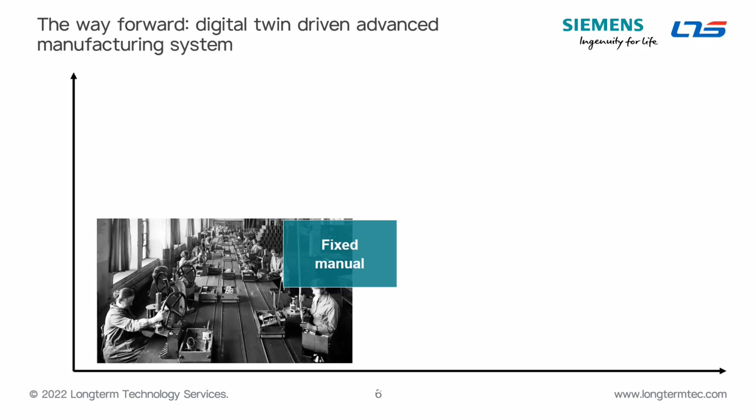Let's go to the next slide here. If you look at the different types of manufacturing processes, on the bottom left here, this is a fixed manual type of mass production. It can do mass production, but it's difficult and expensive to scale it up. On the top left is flexible manual mass production. It utilizes some automation to assist the manual operation, and it's more flexible, but it's also difficult and expensive to make changes to that.

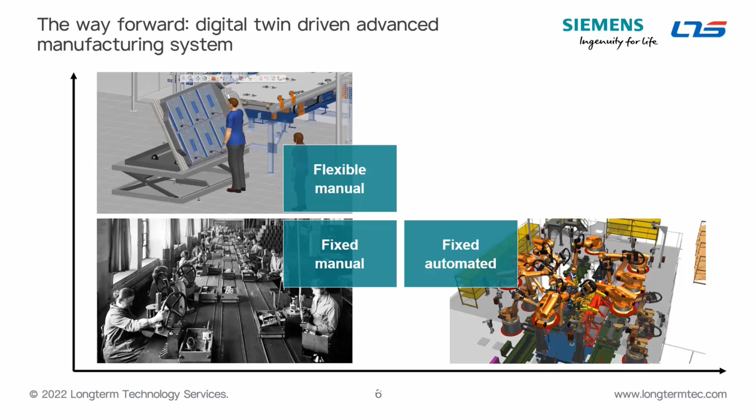On the bottom right is fixed automation systems, very prevalent today for mass production. It does the job, but it's also difficult and expensive to produce multiple products on the same line. So where things are moving is to this flexible, autonomous type of manufacturing. This is mass production that's flexible, but it's easier to accommodate changing product mixes. And that's the good news. The bad news is it requires more upfront engineering and planning. And this is where the digital twin of production systems is useful to speed up the design process and prove out the process before we actually implement it.

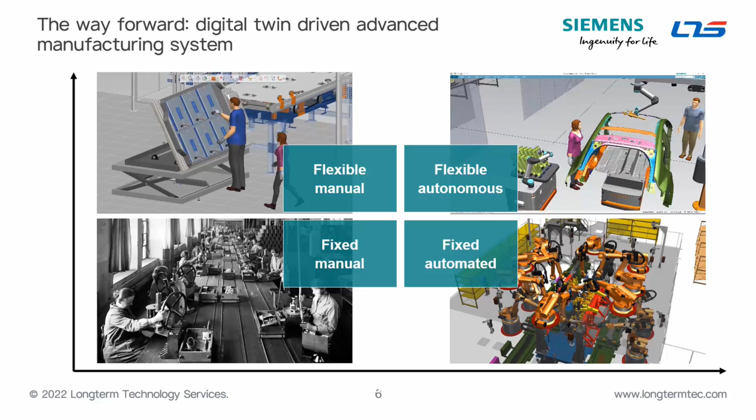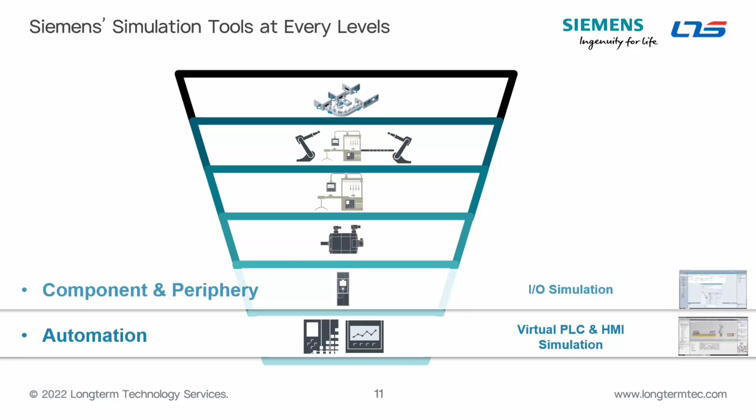Let's look at the next slide here. It talks about virtual commissioning and manufacturing simulation occurring at different levels. When we talk about simulation, we can work at different levels in the process. So in this slide, the very bottom level, the one that says automation, this is simulation of hardware devices like the PLC and the HMI. And I suspect that some of you on the line here today may be familiar with Siemens solutions like TIA Portal and PLCSIM Advanced, which fall into that category.

So Siemens offers simulation solutions at each one of these levels that we're showing here. But the one that we'll be addressing today is the second one from the top. It's called Robotic Station and Line. This is a simulation of the automation systems. And we'll be discussing virtual commissioning in the context of that level there.

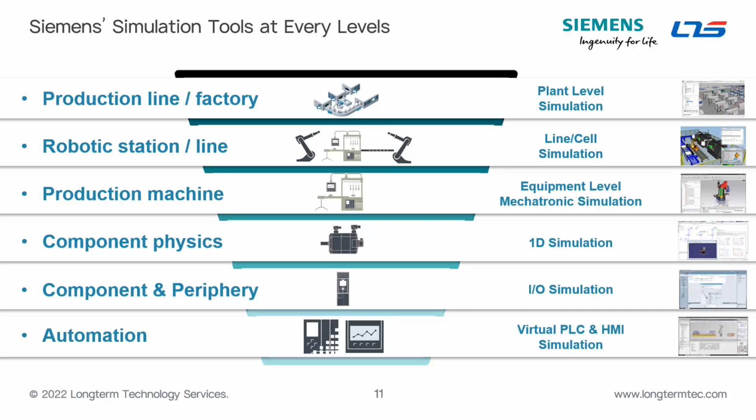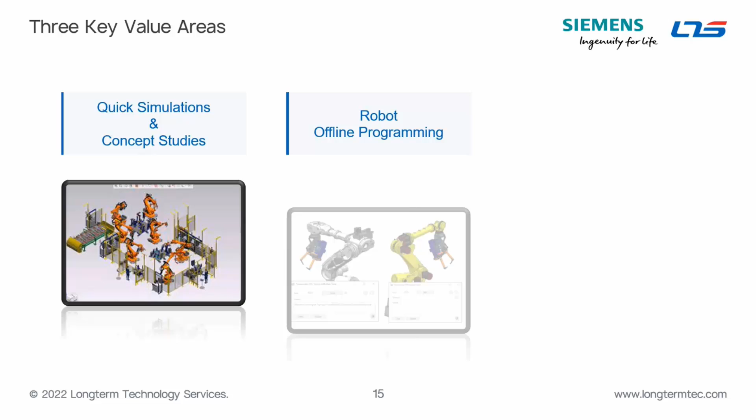So three key value areas, especially in the SMB space, for Process Simulate are quick simulations and concept studies. This is referring to what you're looking at early in the sales cycle. So your cycle time studies, quick simulations.

We've seen a lot of companies, especially SMBs, compete with much, much larger automation providers by creating these simulations up front and really giving the customers the confidence that they're already pretty far down the road in terms of the design of the process and the system. And we see this really helping companies win contracts in those early sales stages.

From there, you get into your robot offline programming. Process Simulate is a platform where you can do robot OLP programming the same way that you would do with your vendor softwares, like RobotStudio, KUKA.Sim Pro, all of those softwares. You can do it for up to the 15 most common robot brands within Process Simulate, so one platform for doing all of that.

And in so doing, you are prepping your simulation for virtual commissioning, so when you're driving that system using your real PLC or HMI.

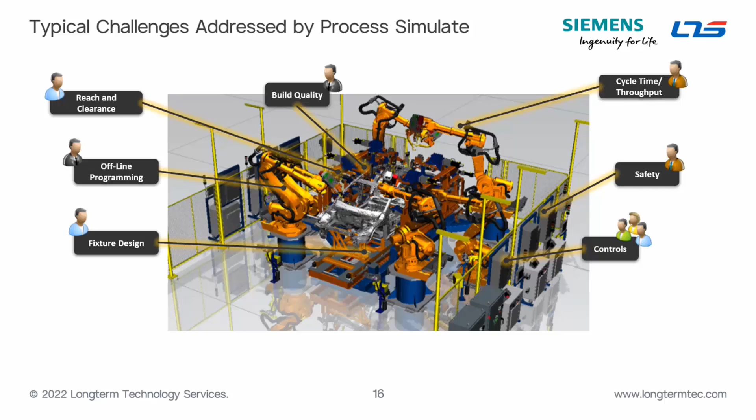Typical challenges that people are addressing with Process Simulate are things like your fixture designs, your robot offline programming, you're validating your reach clearance with it, overall build quality, you're generating cycle times using the software's engine and algorithms. You're validating your safety, your controls through virtual commissioning, overall system layout, and any requirements that you have to meet, whether that be facility requirements or, as we're increasingly seeing, requirements from your customer.

As Brian mentioned earlier, we're really starting to see a lot of these documents now coming out of the OEMs, and the OEMs are saying, for this project, you must use Process Simulate. There's even been situations where the people we were talking to thought that Process Simulate was actually referring to the phase of the project rather than calling out a very specific solution that they had to use. And in those cases, we have to point out, no, it's not just a project phase. Process Simulate refers to the tool itself.

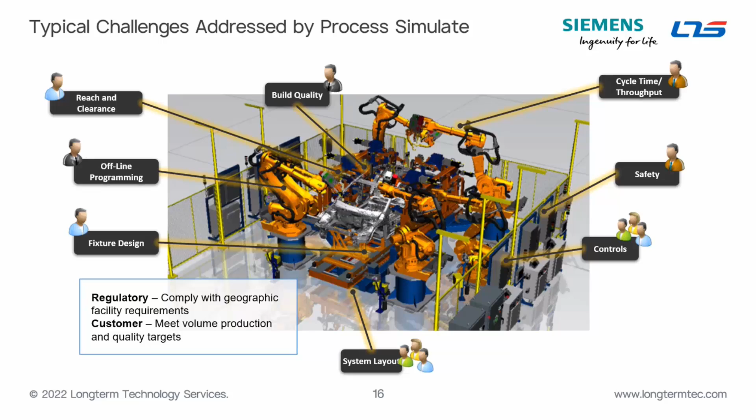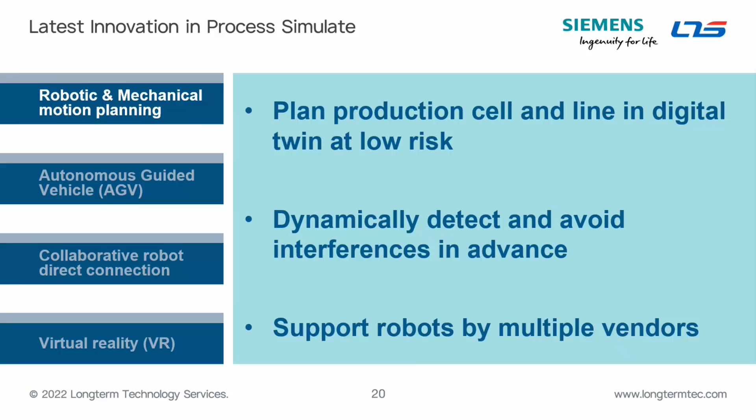And with that, what you're doing is your process definition, your robotic programming, your automation controls, and your virtual commissioning. Now, some of this on the robot programming side, I'm going to move through pretty quickly because the topic today is virtual commissioning. This is just more foundational for prepping a simulation for virtual commissioning. So here you're going to plan your production cell and your line in your digital twin at low risk, as Brian has mentioned, and you're going to detect and avoid interferences in advance.

So what you're seeing on the screen here right now is an example of somebody performing their robot offline programming using Process Simulate. So here you have a KUKA robot with an end-of-arm tool that is doing a pick-and-place operation onto a conveyor with battery packs. And what this is going to demonstrate is the person using this software to detect a collision and then fix that in the robot program.

So first, they're going to hit play and run this simulation. And we're going to see that when they do that, the end-of-arm tool is going to come down at a poor angle, and it's going to clip the edge of that battery, which you see highlighted here in red in the collision viewer, and down here in yellow it's highlighted on the 3D as well.

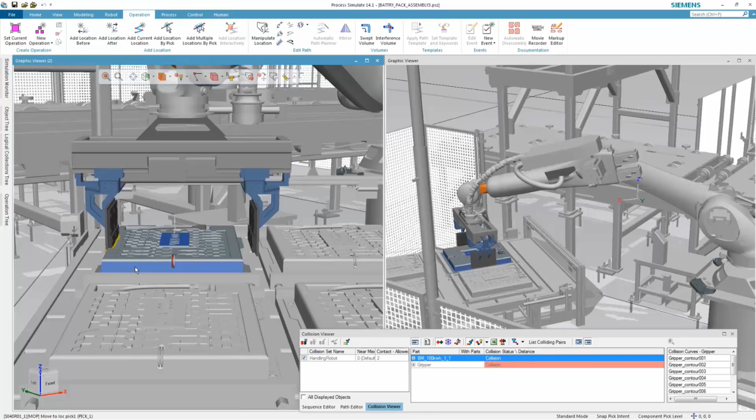Once the user realizes that this issue is happening, they're going to use the software to get a proper approach angle here and jog that robot up and down on the axis to make sure that the approach is correct. Once they have the approach that they want, they will restore the gripper action, the grip closed, now that they have got the path they want. From there, first they will validate that the path is correct. Now they're happy with that.

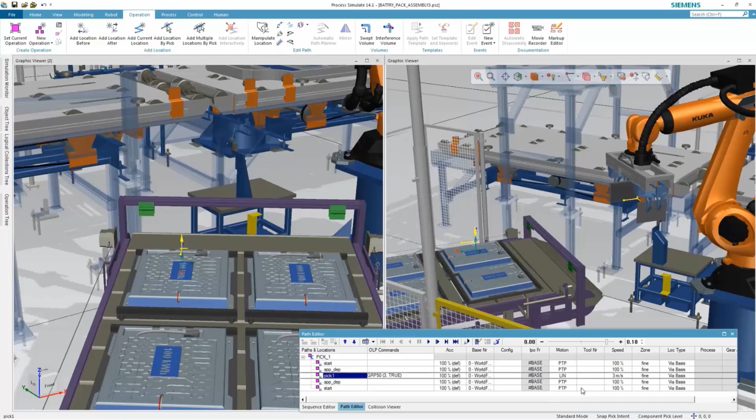Now that the path is correct, they want to finish off this action by setting the motion parameter, the OLP command, by putting in the grip action there, adding that, rerunning it, and now the program is running appropriately. It's a pretty simple example, but this is just to give you a sense of the UI of the software and how somebody is performing the robot offline programming within the software to generate that robot program that you will later virtually commission, and the fact that you can do this with any major brand of robot within Process Simulate, all on a single platform.

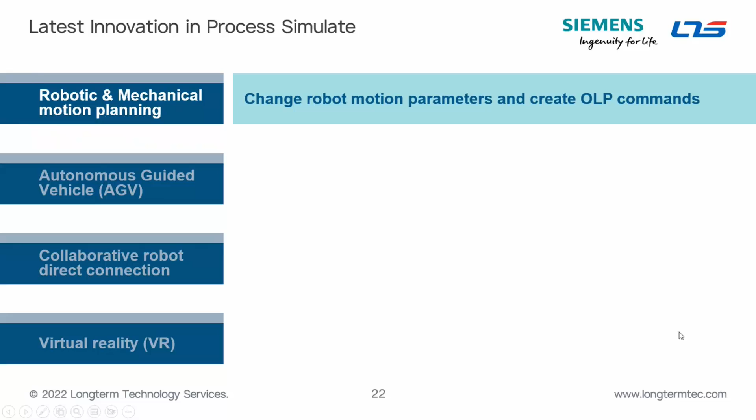So there we were looking at changing the robot motion parameters and creating your OLP commands. Another really cool thing with Process Simulate is when you're doing your design reviews and your remote collaboration, this is something you can do with your own team. This is a single button you hit within Process Simulate to bring you into this view.

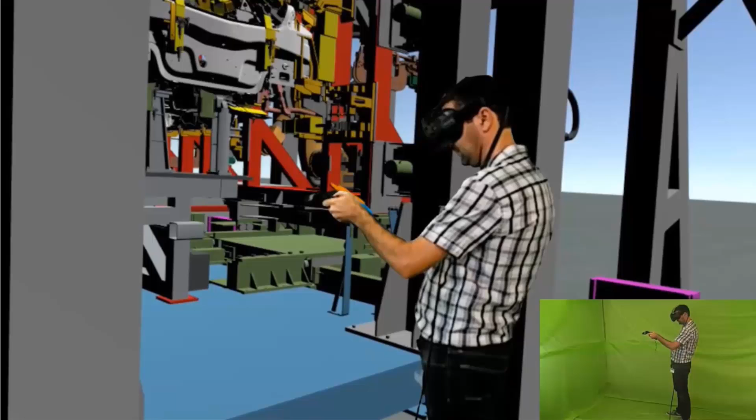You can do design reviews with your team, or you can do design reviews with your customer if they want to get a sense of the scale of the system and really make it tangible for them as they are waiting for it to arrive and be set up, especially if you're waiting for the physical hardware. This can just help create a lot of peace of mind and can help them ask questions about the system and how you're going about designing it. And that allows for greater collaboration and evaluation of that system.

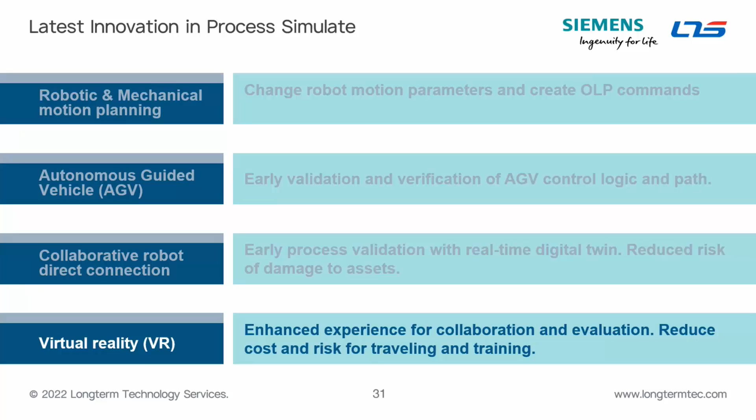Before I proceed, since I'm getting into virtual commissioning now, any questions so far about what you've seen?

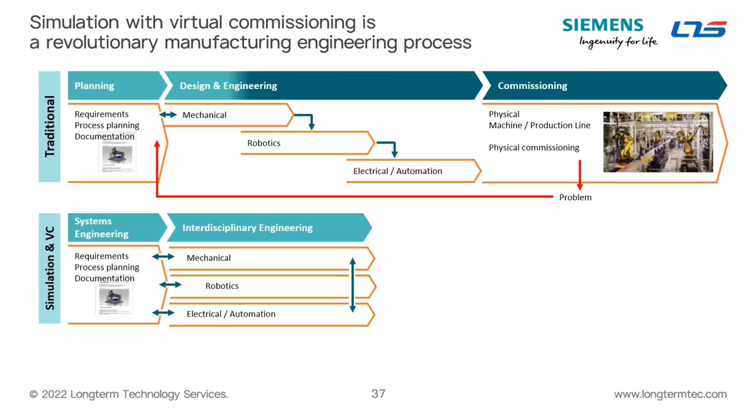What's happening with virtual commissioning is that you still have the same requirements, process planning, documentation, but once you get into the engineering phase, because the mechanical, the robotics, and the automation are all validated and tested within the exact same tool, the same virtual environment, that creates a lot more simultaneity in the work between those groups and a lot more collaboration, because people can basically dump their work into the Process Simulate software as soon as they really have anything, even a concept.

And then from there, you're moving into your commissioning stage. And now that physical commissioning time is significantly compressed because it should be extremely turnkey by the time you get through your virtual commissioning. It should be one and done. It's all working the way you expected because you have validated that against the digital twin in the virtual setting. If you do catch a problem, it's going to be caught in the virtual world. And that will save you a lot of time, including money and possibly reputational risks if those problems were caught at the stage of factory acceptance testing.

And the idea there is that a lot of time is saved, more financial return, and this is really being driven by the tier ones and the OEMs especially, right? Because they need predictability over the timeline, and with hardware wait times and this and that, they need it to work when they turn it on the factory floor, and they cannot have a team in there setting up and tinkering with a system for much longer than they anticipated, which is why they need the peace of mind that comes with virtual commissioning, which is why they are demanding it from their suppliers.

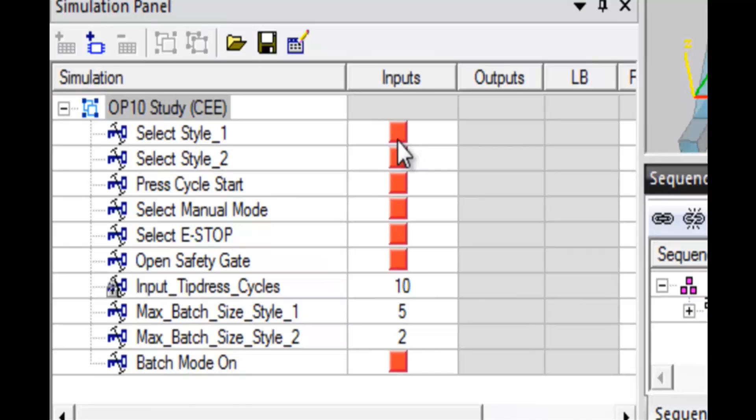Now, virtual commissioning solution overview. So the big thing to think about here is the fact that virtual commissioning is using your simulation that you have built in this program, but it is a signal-based simulation. So it is using your signals. And I'm going to give you an example of it here. In this case, you have two robots in addition to a pedestal, welding station, and a conveyor belt. So simple example, but just to illustrate the concept here.

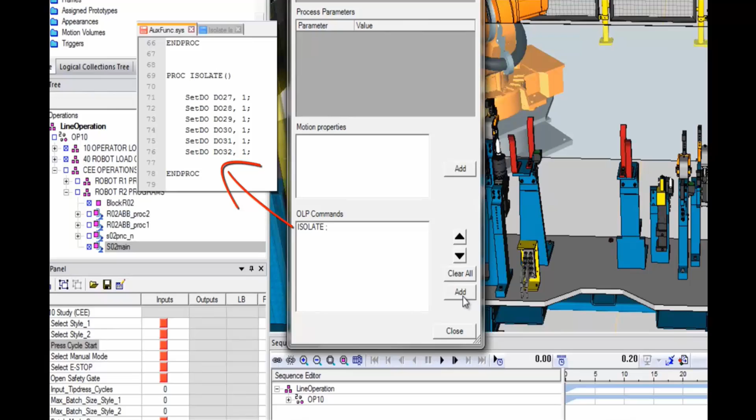First, this person, as you can see there, is manually triggering the inputs. The spot welding gun is coming in there on the part, but there is not a program yet for that second robot. So the user here wants to call a program that has already been created in the software for that second robot. So this gives you an idea of the UI that they are using to add that program. So they're adding in a new command.

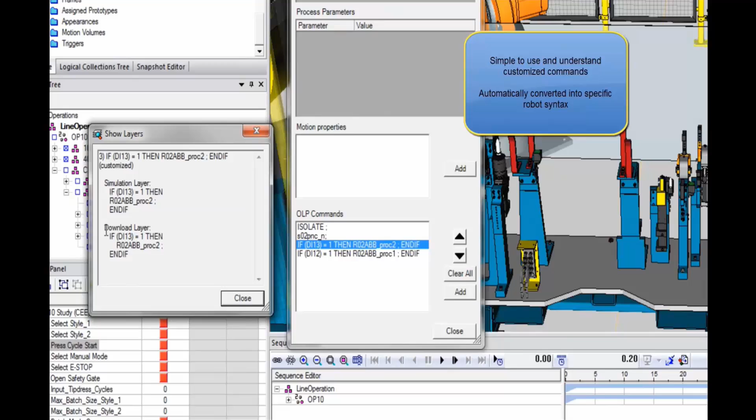They're going into the path to execute. Out of the paths that they have already programmed using the same software, they're calling that path. They're calling the style and the process signal and the path to call. They're adding that in. And you can customize all these commands. The other important thing is all of these commands are automatically converted into the syntax of whatever robot you were using. So these are good to go once you have generated these robot programs.

And finally here they are adding the home position. And from there, now they've added that second robot's program to be called, the signals. So in this case, they want to send the part to the pedestal welding station as well. So spot welder coming in there. Now the second robot has the program to be called, is bringing the part over to the pedestal welding and then onto the conveyor to be taken away.

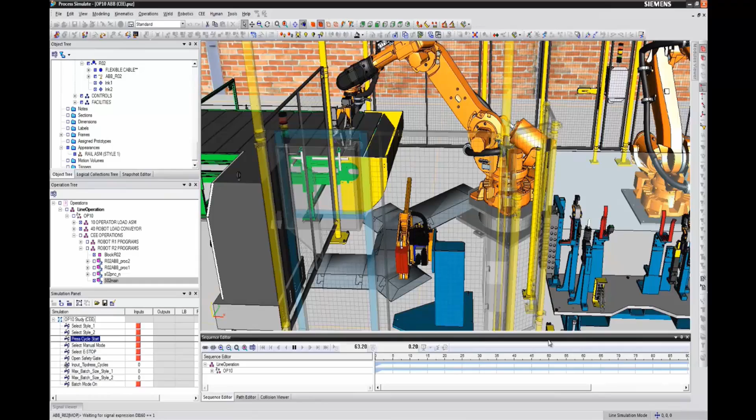So the next question I ask is, well, what if I want a variant? What if I want to skip the pedestal welding? Well, because of the way that they have inputted their paths to call, now they can very easily trigger the signals in order to skip that pedestal welding and bring that part directly to the conveyor.

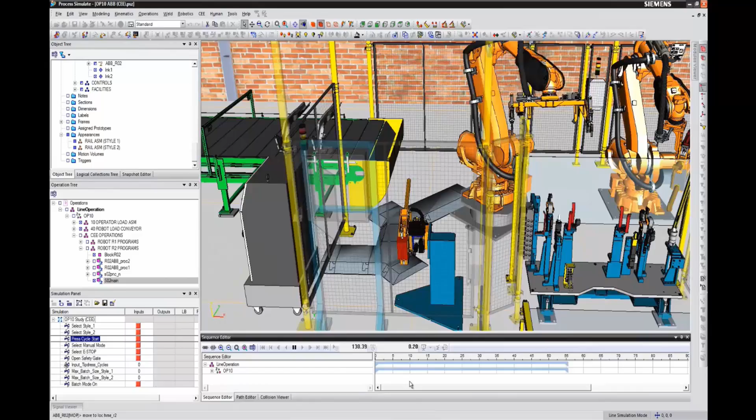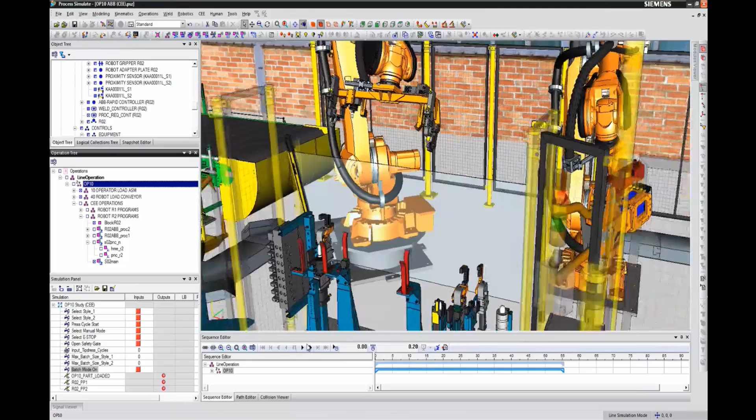For this third example, we want to see how they address a problem that is caught in the simulation. So if in real life, service personnel left the gripper closed, is there a way to handle that with your signals and to safeguard against that, is the question they're asking here. So they are playing this simulation. They're manually activating those inputs.

Spot welding comes in as always. The gripper comes in. That gripper is in the closed position, so it wasn't reset to the open state, and there's potential damage to that gripper, the robot, the fixture, all of it. This is not something you would want to catch on the real system. So this is a quick run through how the person is going to troubleshoot that. They want to reset the gripper to the open pose in the first location of the pounce operation to make sure that that is always the case.

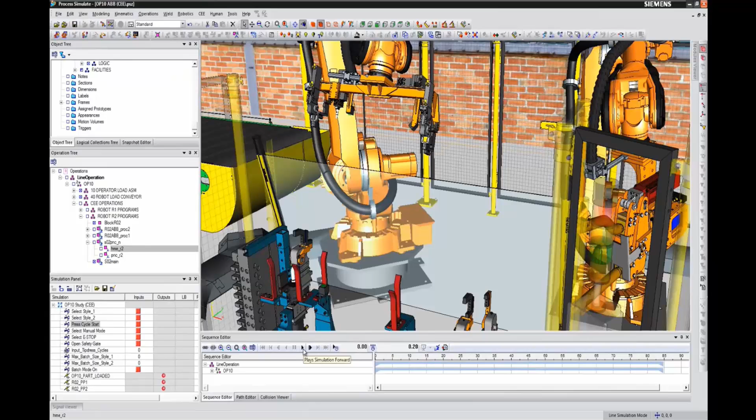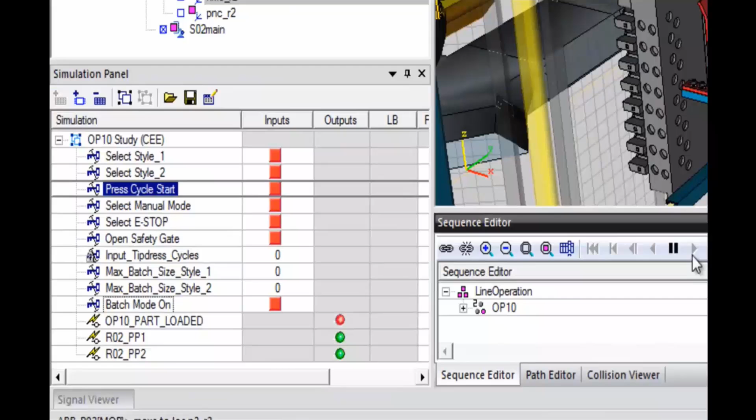They're going to rerun this and test that updated program to make sure that they fixed the issue. Hitting the same inputs. Gripper opens. So now it is working correctly. And it is being taken to the pedestal welding station and onto the conveyor. So that just demonstrates another quick concept of how the user would catch an issue like that and troubleshoot it and remedy it within the software.

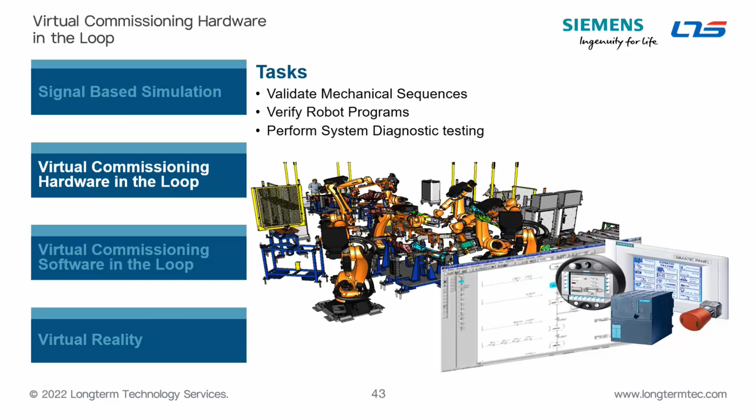And by doing that, you're reducing the overall time of your physical system commissioning, and you're improving the quality of that system, making sure that it is as turnkey as theoretically possible when it hits real physical commissioning. So you're testing your mechanical sequences, you're verifying your robot programs, and you're performing your overall system diagnostic testing on your controls logic. Now, there are two different types of virtual commissioning. One is called hardware in the loop, and one is called software in the loop.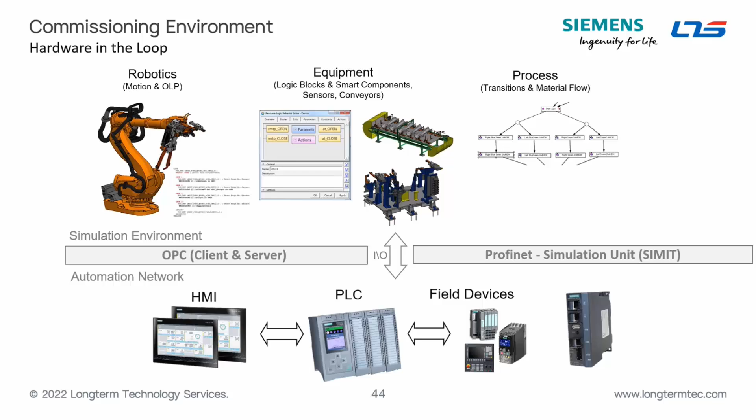So hardware in the loop basically just means you are taking an Ethernet cable and you are running your real device into your laptop that's running the simulation. So you're taking your PLC, you are running that directly into the computer, and you are driving it using the real hardware. You can see here your robotics, your equipment, your process, all of that is inside the software. Outside the software is your physical devices that you can run into that computer to drive the simulation. And that helps you avoid any of those unplanned delays during your system startup.

And then the other example that you see here is software in the loop virtual commissioning. This is when, as Brian mentioned earlier, you are using software like TIA Portal, PLCSIM Advanced. You are emulating, you're simulating your hardware in this case. So this is valuable in cases where, let's say you need to be portable. You don't necessarily want to set up all of your real hardware to do your virtual commissioning. You just want to do it conveniently and emulate that hardware or your PLC, your HMI on your computer screen. Everything above here is the exact same. It's just more what you are using to drive that simulation, the real hardware versus emulated hardware.

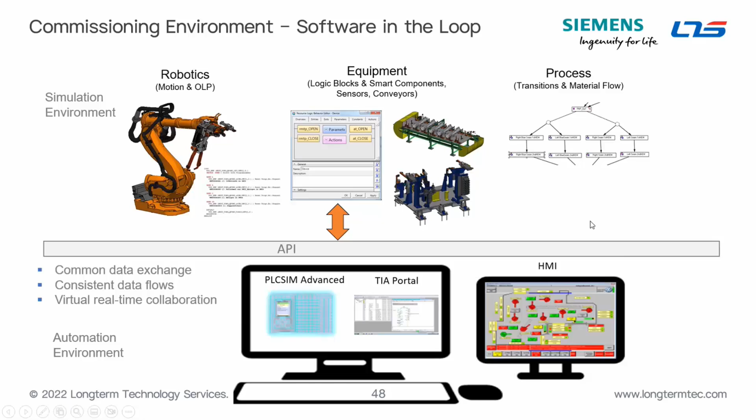I want to quickly share the computer audio here to make sure. So in this next video, this is going to give you a quick walkthrough. This is Tungwon, who's with us here today, providing a quick walkthrough of connecting the software with the PLC, which will help give you a sense of the workflow that is associated with establishing that connection. And please let me know if you cannot hear the audio here when it starts.

So this is a short video to show you how you can do virtual commissioning with a virtual PLC from Siemens. On the left side, we have the PLCSIM Advanced opened. Now we're going to create a virtual PLC called 5G test. Let's do that. So we have the 5G test, the PLC, running in a couple of seconds. So it's showing a yellow light, meaning there's no program in it.

So on the right side, we have the TIA Portal, which is a programming platform for the Siemens PLC. So we have control logics already created here. We're gonna download it to the virtual PLC we just created. So we can download it.

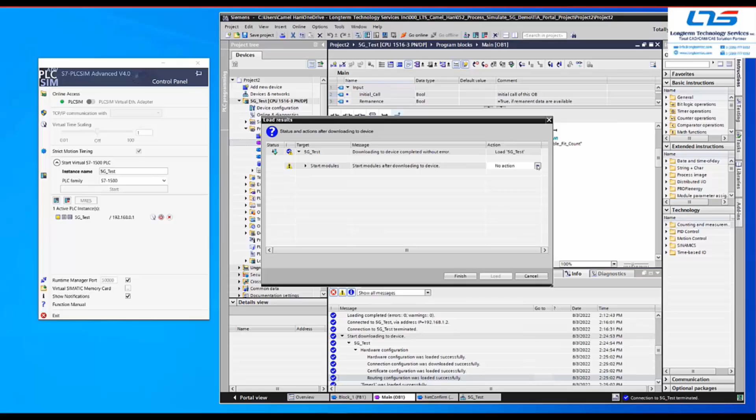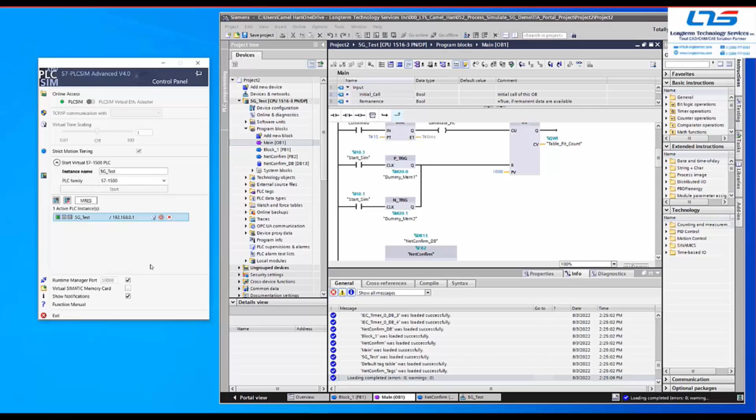So now the software is trying to download this, and it's completed very fast, and we can see the virtual PLC is showing a green light, which means the program is successfully loaded into this virtual PLC. Now we can go to Process Simulate. We have the project here, and we're going to define the connection here in Process Simulate.

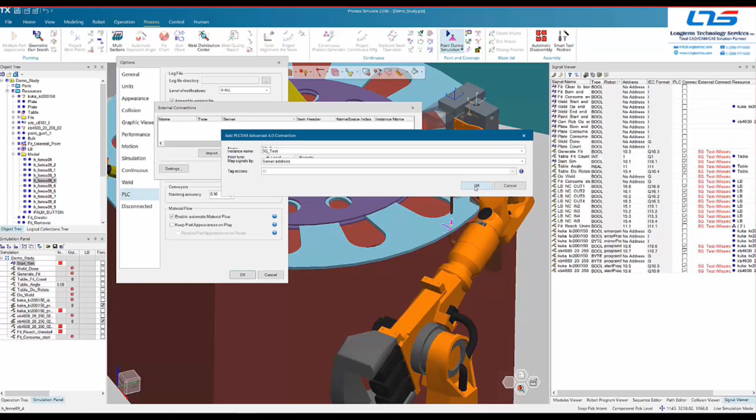So in Process Simulate, we can define an external connection, and we can choose from the menu PLCSIM Advanced. Now we can see the 5G test instance has already popped up there, so we can just choose that, and we're going to map the signal using the address for the Siemens virtual controller. So now we can validate this test. It's just a process to see if it is actually successful. It shows it works well. Click OK. And we just defined the external connection to drive our simulation.

The final step is, on the right side of Process Simulate, you can see there are a couple of signals. And we're going to tell the software which tags, which controller you want this signal to be controlled by. Since we have the 5G test already defined, it's already popped up there. Now I think we can start our simulation.

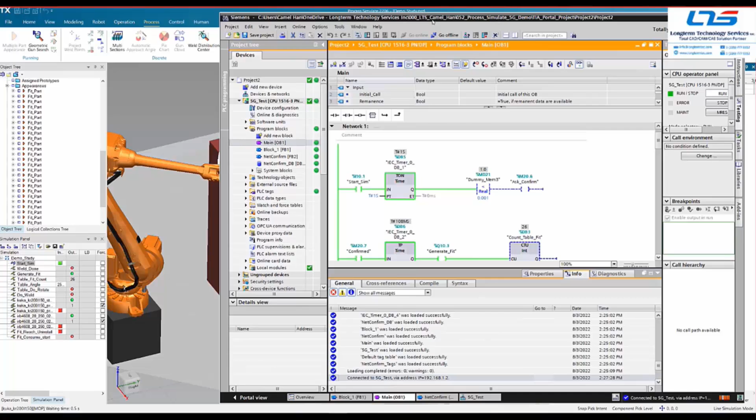So in this simulation, we have a spot welding and a painting robot. All the motions here are driven by the external PLC. And we can switch over to the TIA Portal and go online there, so that in this way, we can check the signal in real time. And if you need, you can modify anything here to debug your control logic.

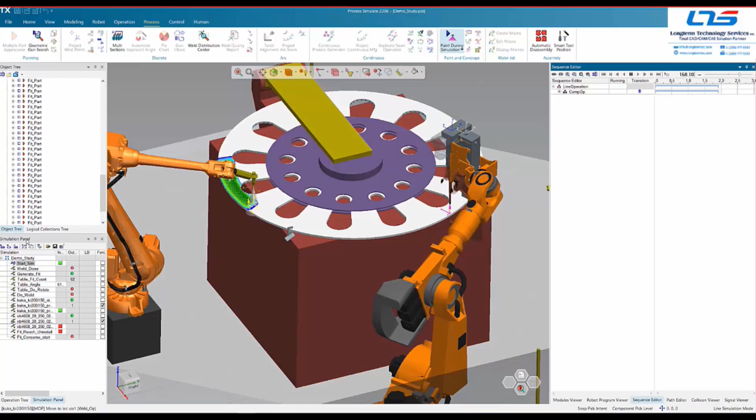So that's it. If you go back to Process Simulate, on the left-hand side, there is a simulation panel. That is really up to you. You can pick a couple of signals. You can also monitor the signal status here. Sometimes this is a very handy feature to debug, manually controlling some signals from here to test your robot cell. So that's the process. A similar process applies to Rockwell. The only difference is in Rockwell, we purely use the tag name to map the signal.

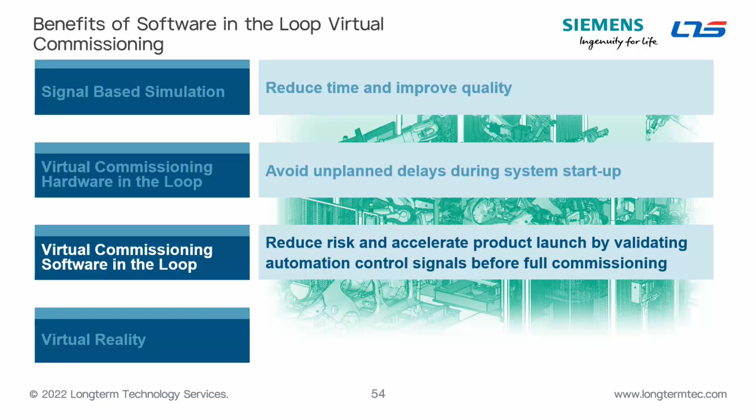Okay, and as you saw, that was basically an example of how you use the system to connect the Process Simulate simulation to your emulated hardware. In this case, you're reducing the risk and accelerating your product launches by validating your control signals before full commissioning. So quickly here, I want to go through a couple of case studies of companies. These are more recent case studies of companies that we have worked with in achieving success with Process Simulate.

The first is Global Vehicle Systems, based out of Tilbury, Ontario. Their challenge was that their controls engineers were waiting to access real production systems to start debugging and validating their control logic, they were spending more time tinkering on the shop floor during commissioning, and they needed to speed up their factory acceptance testing. So we worked with them using virtual commissioning and Tecnomatix Process Simulate to increase their engineering transparency and productivity and inspire customer confidence. They ended up saving 30% on real system commissioning time, double-digit efficiency gains in engineering, more business won, and increased customer confidence.

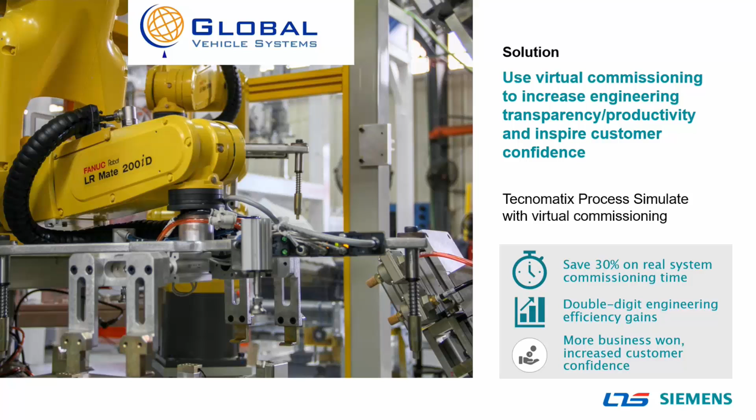They're doing some really great things with internal design reviews on virtual commissioning, checking everyone's work against the virtual system, and doing design reviews with customers, also using virtual commissioning to create that peace of mind for their customers, that they're seeing their future system being driven by the real control logic. We worked with Global Vehicle with formal training as well as on-demand mentoring and follow-up support to make sure that they got what they needed to achieve these results.

The next team that we were working with is Ethos Automation. We just published a case study with them as well. They were losing time altering their robot programs after the shop floor setup, so they needed to validate and generate accurate robot programs more quickly, and they needed a competitive differentiator during the sales phase. This is what I was talking about earlier: they were also using those 3D concept studies and cycle time studies to differentiate themselves in the sales stage, because if you're a smaller company up against a huge company and you might not be as well known, it goes a long way to show your customers something extremely tangible in terms of the system that you are going to provide them.

And with that, Ethos was really able to work with us. We provided training, on-demand mentoring, got them all set up with it. And overall, they had a 25% reduction in their robot programming times, big increase in the accuracy of their cycle time estimates because they were using that engine within Process Simulate to generate those cycle times. More business won in the sales stage, more customer confidence.

And as the co-founder and automation specialist, Calvin Kimura, says, with the addition of this to our toolbox, we've been able to supply our customers with a complete turnkey automation solution. Bringing this in-house, we were able to validate any automation project with a high level of accuracy.

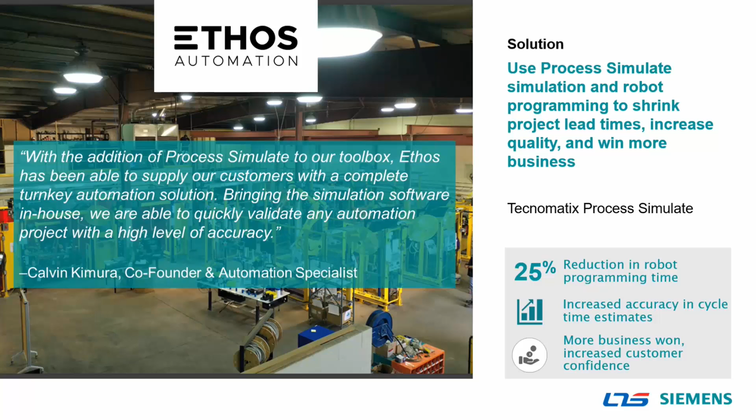So there, I do see a question come in here. Okay. Okay, so I see here that there were some questions there about the volume level on the virtual commissioning video and setting up the connection with the PLC. So you did have the visual cues there. If there was anything you missed in the audio of that video, please don't hesitate to bring it up during the live demo and Q&A session, which is approximately right now.

So with that, I will turn it over to my colleagues, Tungwon and Camel. So these are expert users with the software and part of our in-house engineering capabilities on it. And I will turn it over to you, Tungwon, to do this next phase, which is preparing the simulation for virtual commissioning. And anybody, please feel free to raise your hand throughout to ask any questions during this live demo.

Thank you, Phil. So anyone, if you have any questions, feel free to bring it up. And at the same time, what we're going to show you is how we actually start from the very beginning to bring the model into Process Simulate and define the kinematics signals, and then how we're actually going to connect it to an external virtual PLC. In this case, we are using Siemens virtual PLC, PLCSIM Advanced. So by that, I'm going to turn over to my colleague Camel to share his screen and show you the process.

Yeah. Hello, everyone. This is Camel Han from Longterm Tech, and I'm going to show you a short demo of the virtual commissioning. So firstly, I started with a blank project in Process Simulate. I just try to import the CAD files. So here is the CAD file. And I will try to firstly just create the JT file. So the next step will be importing, and this will be a positioner.

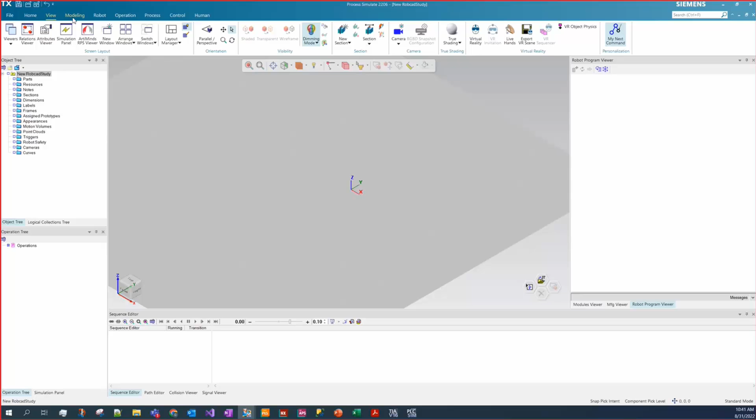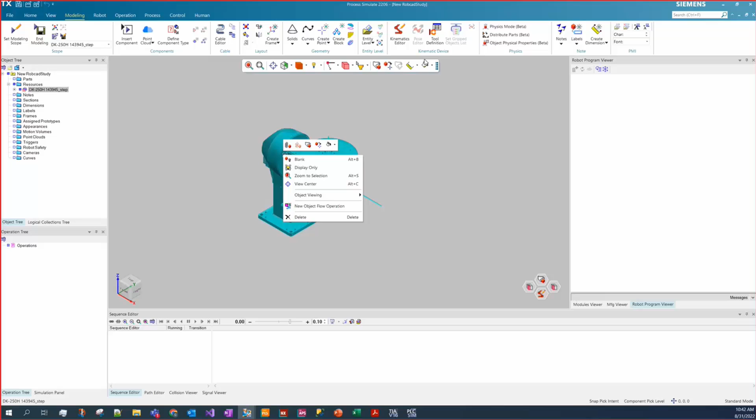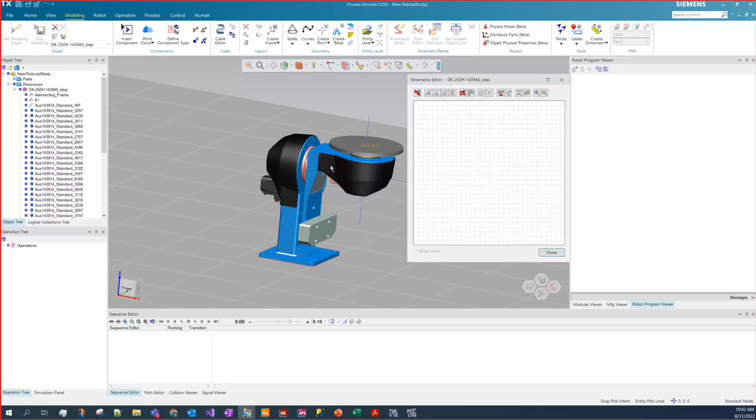Okay, so here we imported a positioner. I'm going to make it in the modeling scope. So here I'm going to define a couple of poses of the positioner, but before that we need to define the kinematics. So the positioner will be tilting and rotating to place the parts. So here I start the kinematics editor. Let me first try to get the tilt. Okay, so this will be the tilt. I will create a link, name it tilt.

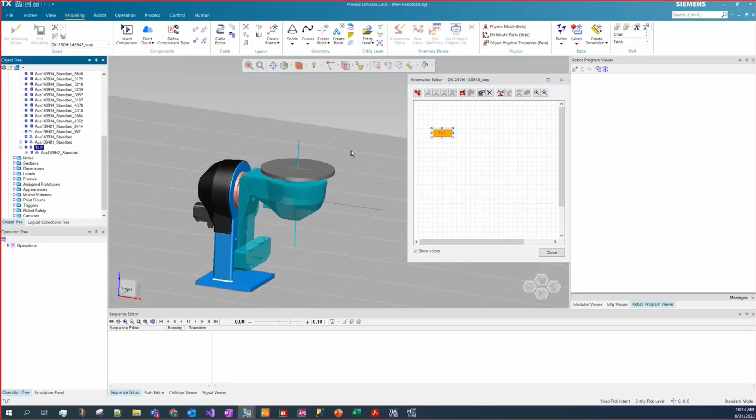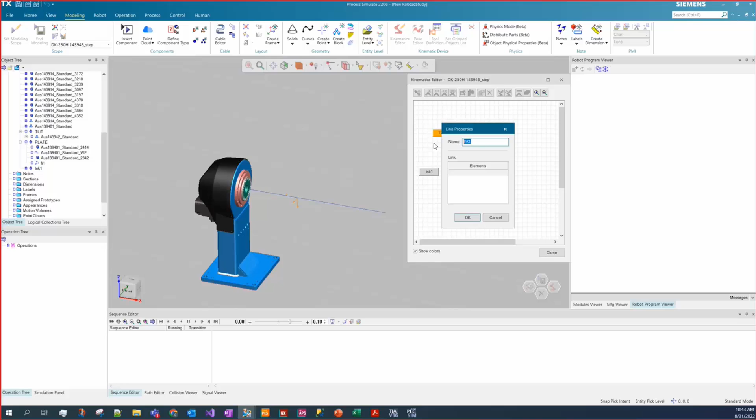Okay. So before I define the other two, I can hide it for better selection. I will create another one, named plate. So this one contains these components. I can just drag these, not these ones. Plate. And just drag a rectangle to multi-select things. Okay. Hide it. And the rest of the components are base. Very simple and easy. So I have 3 groups of components.

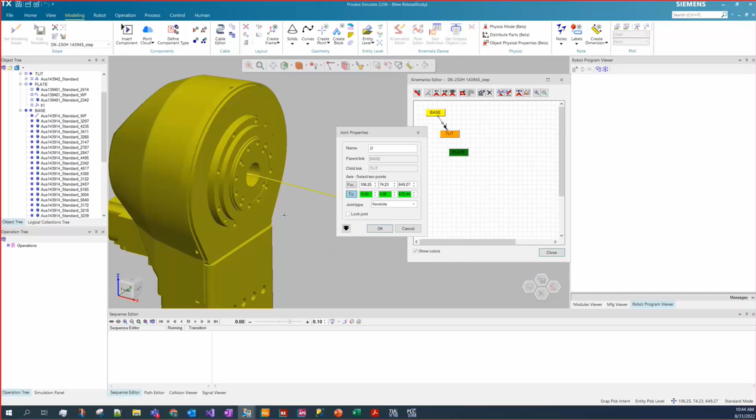Now I'm going to define the kinematics. So between the base and tilt, we have a joint, which is a revolute joint, and I need to define the from and to for the joint. So this will be the axis that the joint will rotate around. So this joint has limits. I use constant limit. The higher limit is 90 and the lower limit is minus 90. I have the speed and acceleration as default. Okay, that.

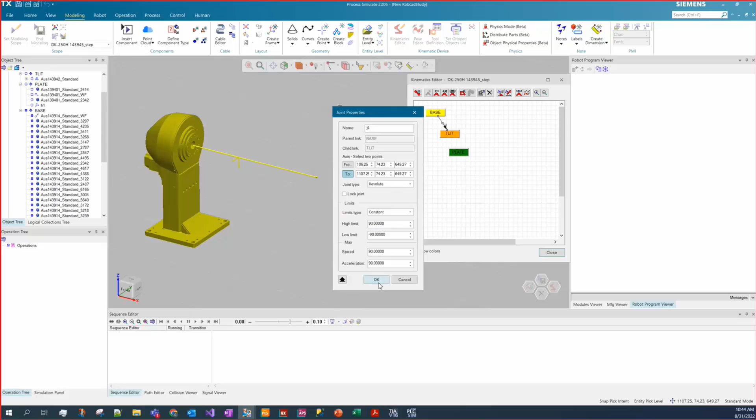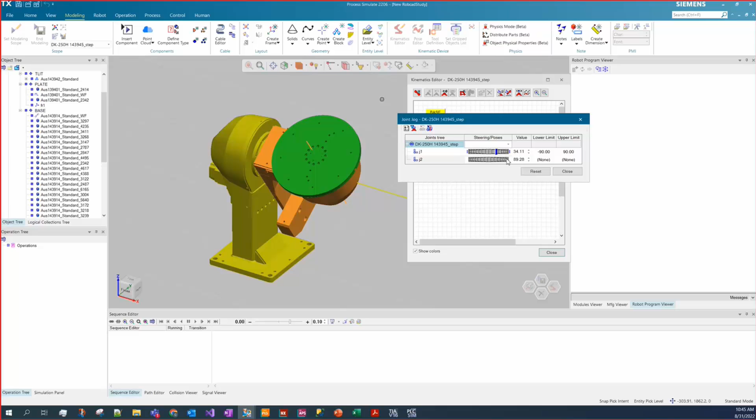Show the plate and the tilt. So the next joint will be the tilt to the plate. The axis will be from bottom to top. And for this one, we have no limits. Just click OK. So we can now test our kinematics. So we have a tilt. We have the plate turning. Perfect. Okay. So now we have the positioner's kinematics defined.

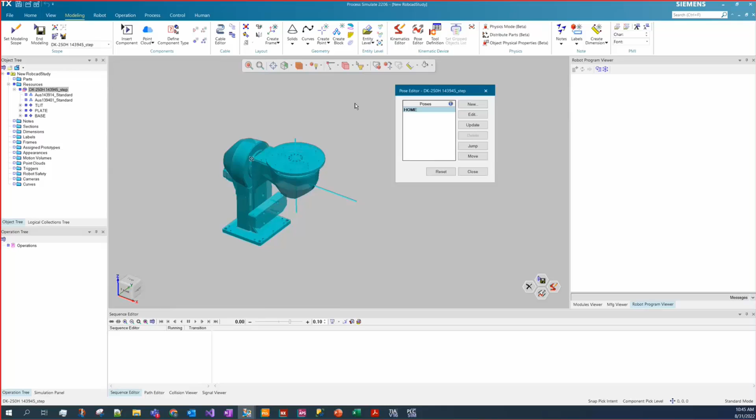Now I'm going to define just the one pose for the demonstration. So we'll open the pose editor. It already has a home pose, which is what it's like when you bring the model in. And now I'm going to create a new pose named tilt.

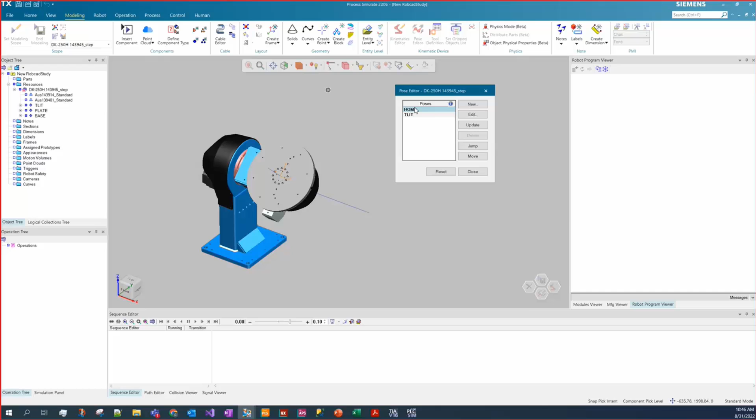So for the tilting, I would say let's tilt for 90 degrees. 45 degrees is better. And for J2, I would just let it turn 90 degrees. Okay. So now we can move between different poses and test the kinematics. And that looks great.

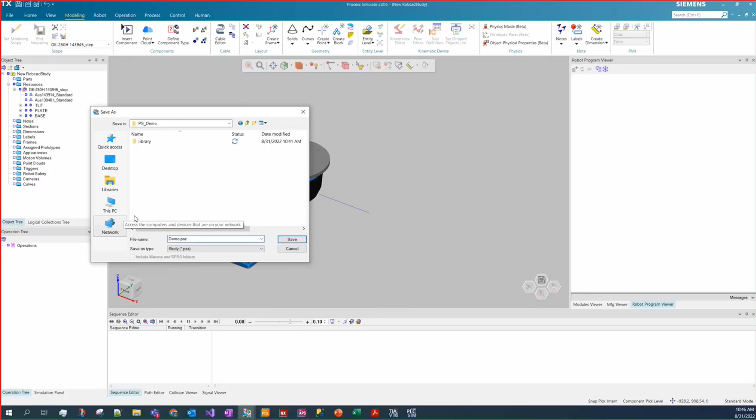Okay. Let me save the project. So I'll just save it in the PS demo. Let's name it demo. Okay, then we can go to the simulation mode, line simulation mode.

So we have a line operation, and now I'm going to define a couple of the operations. So here we just do the device operation to change the pose of the positioner. I will say the device is the positioner, and the first one I will say to home. So this will change any of the current pose to home pose.

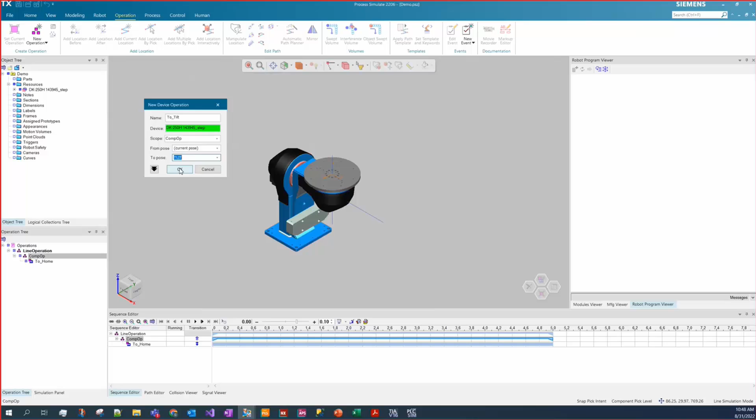I will define another one. The name will be to tilt. So this one will change any of the current pose to tilt. It's very simple. So we already have two signals that mark the end of the operation, but now we want to use the signal to control the beginning of the operation.

So here I use operation signals, create device start signal. I highlighted the to home, so when I click it, the to home start is created. I will create another one to tilt. Okay, so I already have a PLC which has the signals defined, and here I just input the signals address. For the home, the address will be 1.3. For tilt, it will be 1.1.

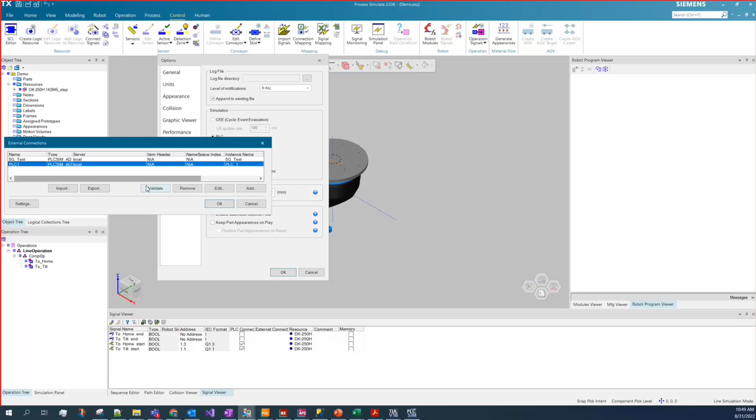Now I'm going to define the PLC connection in Process Simulate. So actually, I already started the PLC Sim Advanced, which has a name of PLC1. So here I just try to validate if the PLC1 is connected, which is true. I have the signals, so the external connection. So I will tell the software that this signal is controlled by external PLC, which is from the PLC1 connection, which I defined in the options.

Okay. Now we're all set. Just run the simulation. Oh, actually, there is another step. I can send the two signals into the simulation panel, so I can always check the conditions, check the status of the signals when I control from outside. Okay, so we're all set, and let's run the simulation. So you can see the home start is already on because the PLC is on.

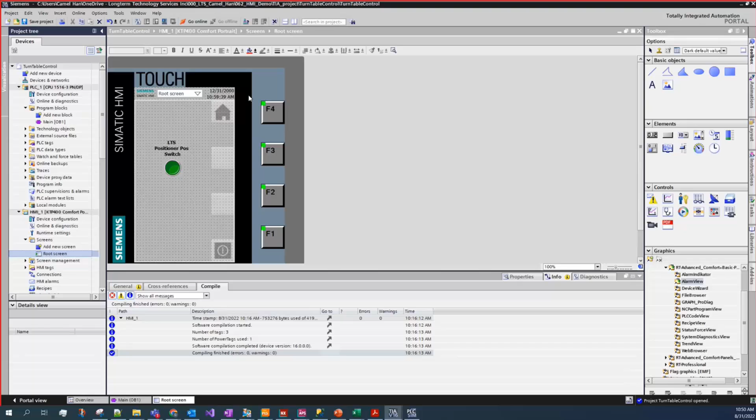Now let me start our HMI, which I created in the TIA Portal. And we just have one button to control the positioner's pose. So just start simulation. Okay, we have it here. So if I turn it on, you can see the tilt start is on and the pose is changed. Take it off, back to home.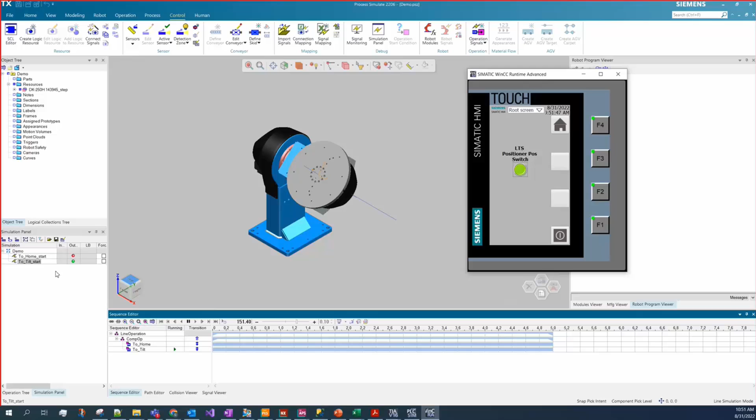So this one is a simulated PLC, but in the real world, you may have a kind of external device to input the signals and get the output from Process Simulate. So basically, this is a way to connect the signals and input and output of Process Simulate with the external PLC or external controlling devices.

Yep. Yeah, we can play it. Okay. So here is the short demo, and if you have any questions, please feel free to ask. Yeah. Any questions about what you've seen so far in terms of the workflows or anything regarding virtual commissioning, whether it's at the high level business or what you've seen here from a technical perspective? Any takers?

I know one question that I hear a lot, Kim, is when you're dealing with very, very large amounts of signals, like you had mentioned different PLCs like Siemens, Rockwell, what are the best practices for bringing in lots of signals? So I think Process Simulate can, first, yes, do the signal mapping. It's like if you have an Excel sheet, right? You can easily get those from TIA Portal, or for Rockwell, it's Studio 5000, and you can easily map it with Process Simulate.

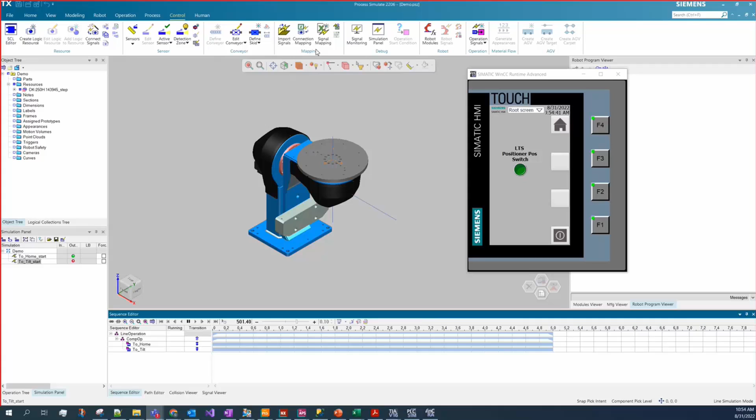Quick question. This might be something that is just generally known, but I'm new to simulations. For bringing in the models of the different equipment that you guys are simulating, do you guys just have a general library, or is that something that as a user I'll have to create for the equipment that I have?

Yeah, basically from the very beginning you have to bring all the components from your design. But as Camel showed, you can save frequently used components, including the kinematics, the signals, and all the details, for future use. Basically you are building your own library while you are using it, and the library is going to grow with you. So that's how we handle this.

And the robots are provided from Siemens. Oh yes, the robots are provided. Siemens has a pretty large online library that contains almost all the brands of robots, and it's updated regularly. So for the robot, you can easily download it, and it comes with pretty much everything defined: kinematics, joint limits, acceleration, all those parameters, and you can use it for your simulation.

In terms of the landscape here, because of our experience, I would say there's some caution to be had. There are solutions out there that offer these pre-built libraries, but the trade-off is that often those have very little flexibility on what you can actually bring into them that's not in those pre-built libraries.

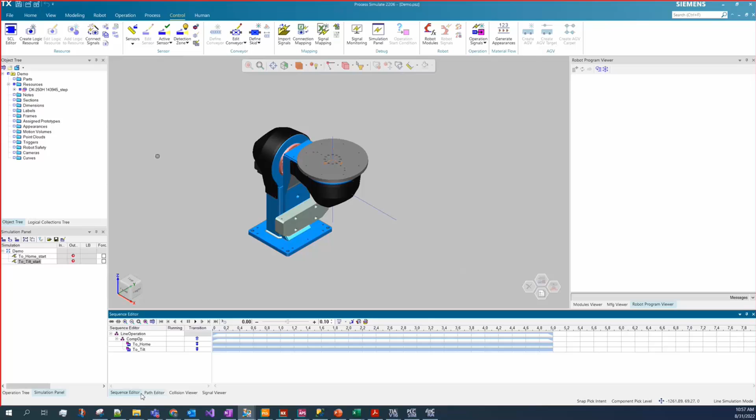And if you are using a Rockwell PLC, Camel, if you can bring up the PLC settings menu here, perfect. For a Rockwell PLC, either virtual or real, there is a menu with direct support for you to set up the direct connection. All you need to do is specify the IP address, CPU and rack number, and then the signals get mapped based on the name. Hopefully that answers your question, Andrew.

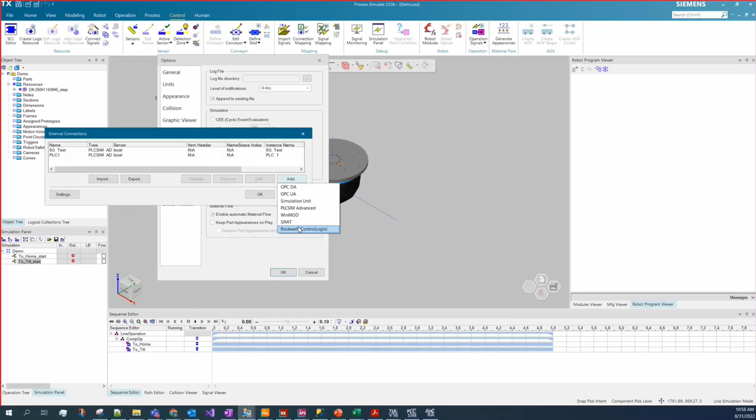And for Adam, is there a feature to bring in robot code? Of course. Camel, you can also show that in Process Simulate. It's really one platform for all the robots. You can directly upload your robot code, whether it's from FANUC, ABB, or KUKA, and get it imported into your project. We don't have the robot here, but maybe Camel can. Give me one second to bring the robot from the library, and I can insert it.

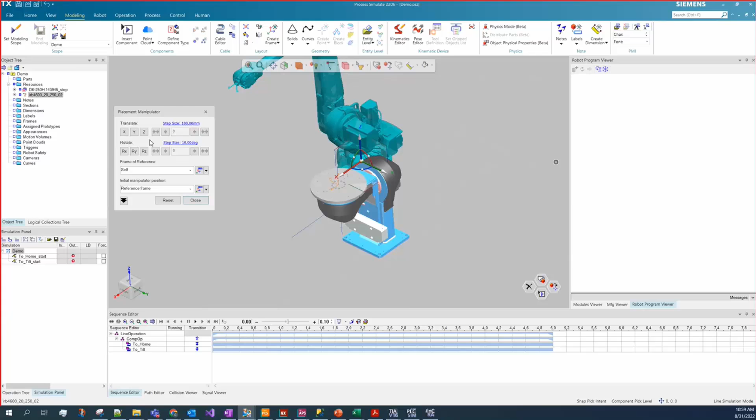But anyway, that is a very typical operation we do every day, I would say. If you have RoboGuide or RobotStudio already, you can easily import all the code directly, and Process Simulate will recognize everything, and you can use those operations in your simulation and validate all the positions, etc.

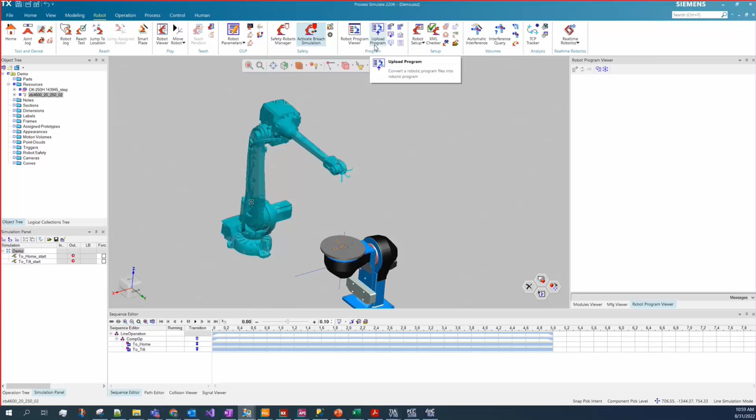So can you run simulation while viewing in the virtual reality? Oh, of course, yes. So we can actually. I think firstly, we can upload the program from external, say any type of ABB or KUKA robot code. That's the thing. Yeah. So what do you do, like Camel?

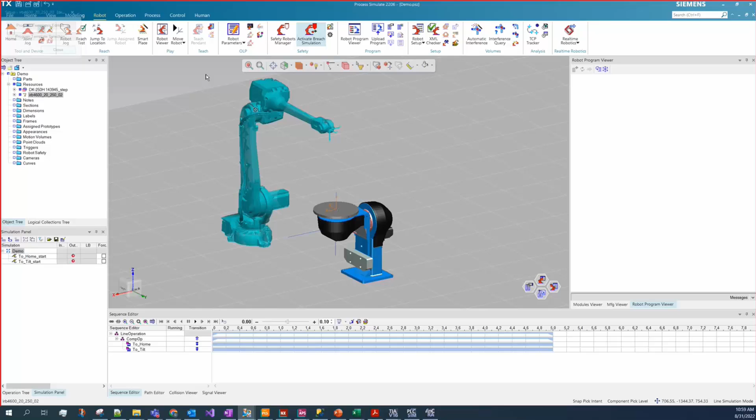If you right-click the robot and you pick the robot controllers from, not exactly this one. Not exactly this one. Here. Yes. So you see here from the drop-down menu, if you can open that, perfect. So that is where you need to tell the software what controller you are using and what version. And then after you define that, you can just directly upload the program.

Sorry, I was going to say, Camel, if you could click on the drop-down list for controller, it does give a sense of all the ones that are in there, just in case people were interested in seeing that. You have a pretty good example there of all the ones you would expect to see: ABB, Denso, Epson, FANUC, any major brand you're gonna find.

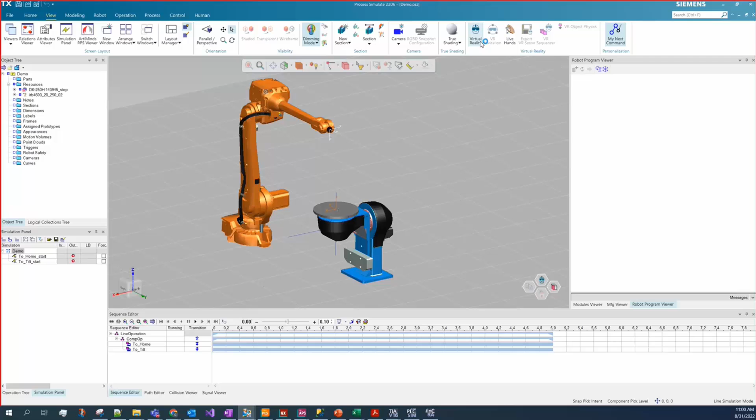And Adam, for your other question, the answer is yes. While you're running your simulation, you can be in the virtual world to see what's going on. I actually have a video of that right here. I'll just quickly show it. If you can see my screen, this is a person running the virtual reality with the actual hardware in the loop.

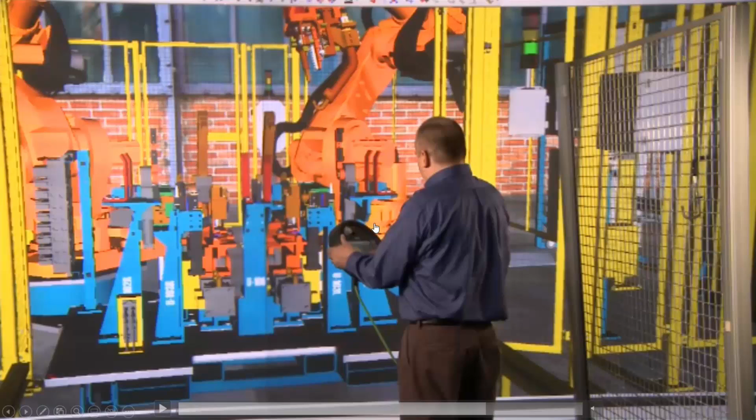This is actually commonly used for training purposes, where you're training somebody using the real hardware and the virtual system prior to the delivery of the system. But you can see this is a person who's operating the system using their device and the virtual reality setup.

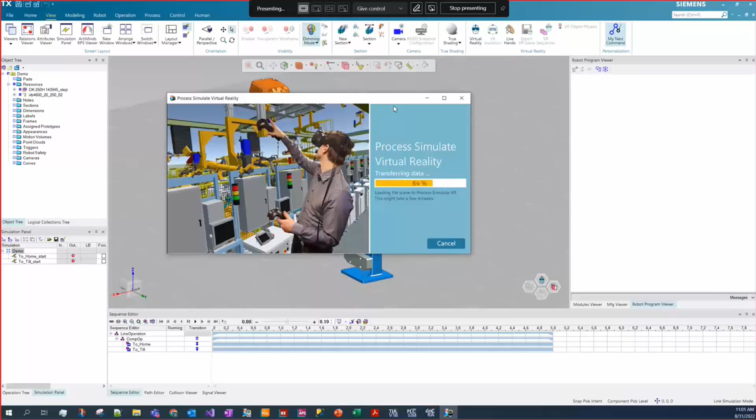And Camel, if you like, you can also show from your side in live mode the simulation we just created. It's an easy one, but I think the concept is the same. It is loading. Yeah, it takes time to load. I don't know if we have enough time. We are already on top of the hour, but feel free to ask if you have more questions.

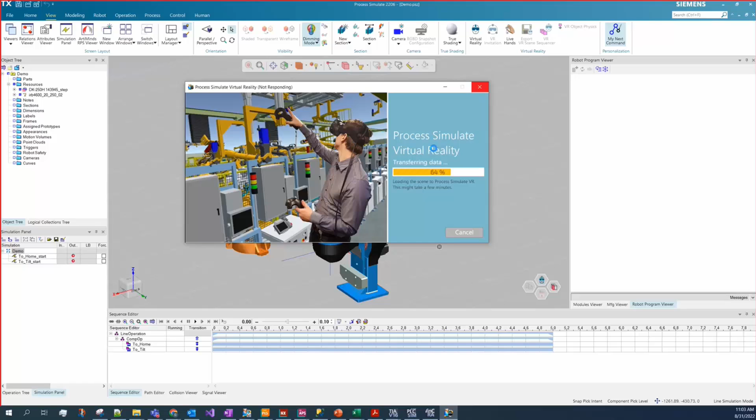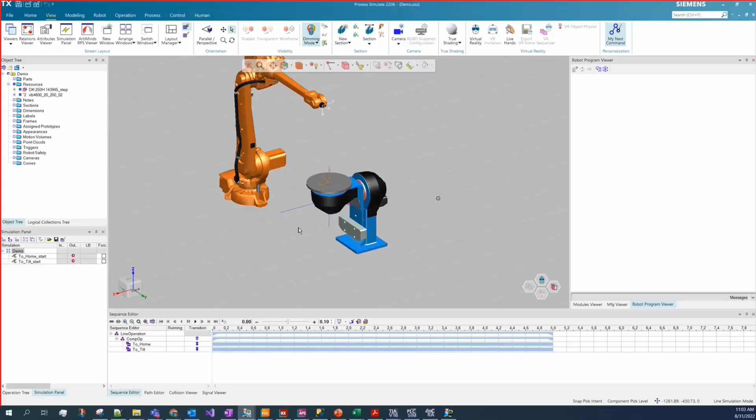The main point we wanted to get across is that this virtual commissioning capability has been standardized on by a number of companies, and that's starting to appear in requests for proposals. So we wanted to make that point, let people know what is available, and give them a feel for how it works. And if you'd like to find out more information, get more details,